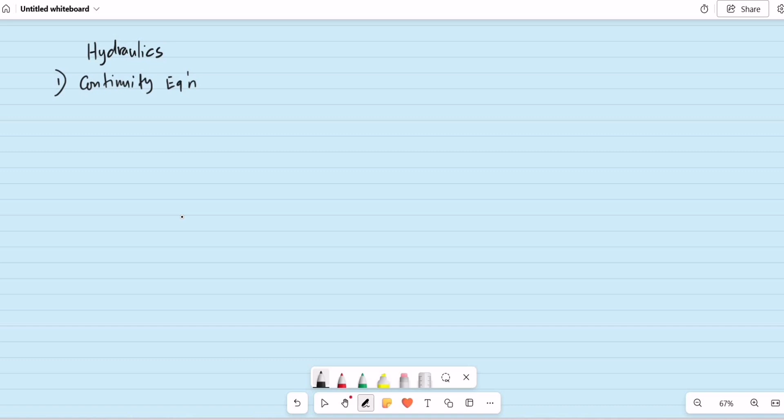So what is the continuity equation? What is the equivalent of Q in hydraulics? It is known as the discharge or the flow rate, equal to the area or cross-sectional area of the conduit times the velocity of flow.

For example, we'll be having a series connection, two pipes connected in series. Continuity equation is derived from the law of conservation of mass. Let's say we have Q1, the discharge in the first pipe, and Q2, the discharge in pipe number 2. So what will be our continuity equation? Basically, Q1 is equal to Q2, or we can write this as area 1 times velocity 1 is equal to area 2 times velocity 2. That is the case when pipes are connected in series.

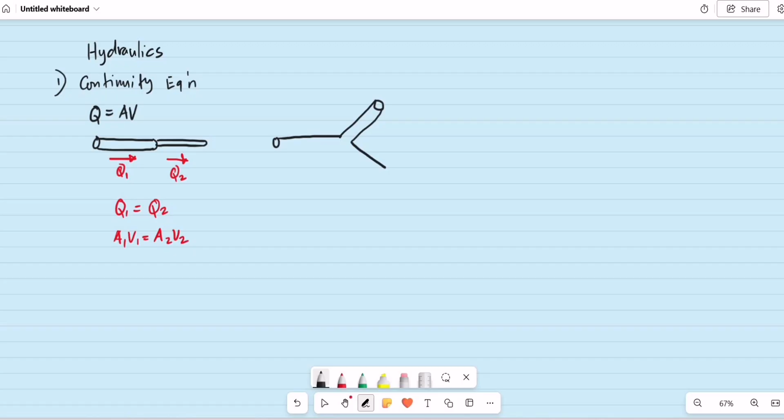Now in case we have a pipe distribution, for example, this is our source. Let's say this is Q1 to be distributed into Q2 and Q3. So our equivalent equation will be Q1, the source, equal to Q2 plus Q3. These are some of the possibilities when it comes to pipe connections, applying the continuity equation.

So the second general equation here in hydraulics is the energy equation, or Bernoulli's equation.

But before we discuss the energy equation, let's go over the energy heads. First, H sub V, the velocity head, which is V squared divided by 2G. We call this the velocity head, basically derived from the conservation of energy from potential to kinetic energy. Take note, when dealing with pipes in hydraulics, I assume the flow is pressurized.

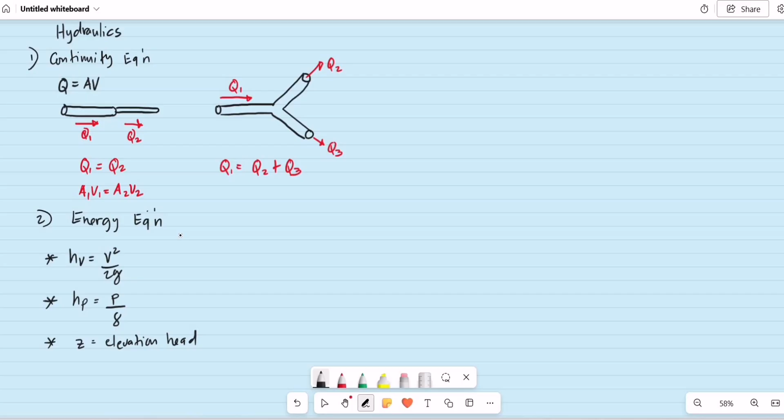So we have the next head, H sub P, the pressure head, which is the pressure divided by gamma, the unit weight of the liquid inside the conduit. And the last one is Z. In most references, they use Z to represent the elevation head. So these are the three energy heads.

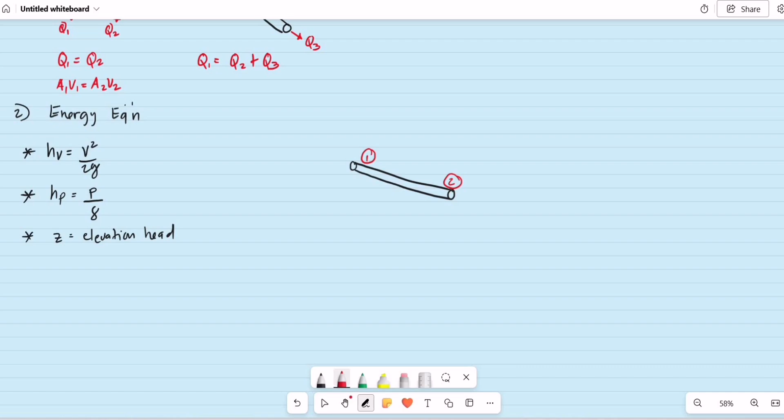So how do we write the energy equation? Let's consider an example. For example, we have a pipe, and all you have to do is consider 2 points if you are to write the energy equation. Let's say this is point 1 and point 2, and the direction of flow is from point 1 to point 2. All we have to do is observe if there are references or elevations given in the problem. So do we have a reference line or datum line? Let's say this is our reference elevation, and the direction of flow is from 1 to 2.

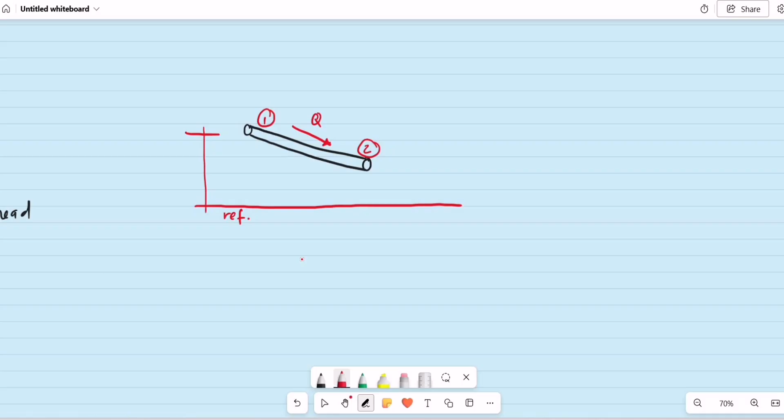So let's have the elevation head of point 1. From our reference, how high is point 1? That is the elevation head of point 1. Above the elevation head, we have the pressure head. Let's say the pressure at 1 is P1 divided by gamma. And above the pressure head, we have the velocity head at 1, which is V1 squared divided by 2G.

Then all we have to do is draw a horizontal line towards the second point. But in actual, the energy grade line goes down with the direction of flow, that is from Bernoulli. The energy grade line goes down with the direction of flow because of head loss. And then on the second point, below the head loss, we have the velocity head at point 2, V2 squared divided by 2G. Below that will be the pressure head at point 2, P2 over gamma, and below that, we'll have the elevation of the second point of the pipe.

So this is our equivalent diagram. All we have to do now is write our equation. This is from the law of conservation of energy, so the energy at point 1 will be equal to the energy at point 2. E sub 1 is basically equal to E sub 2, starting with the elevation head, Z1, plus the pressure head.

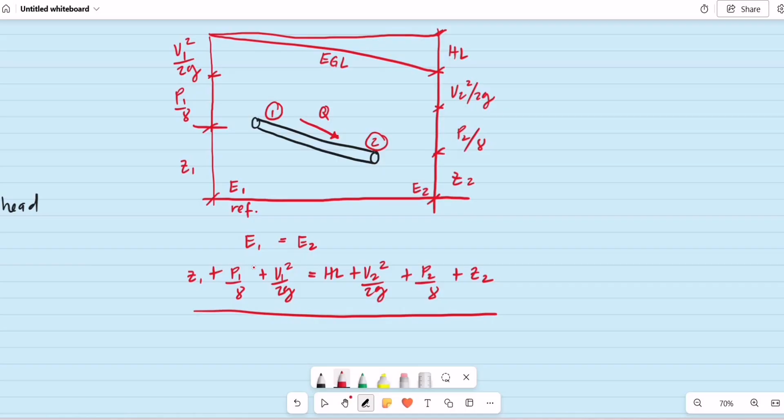We have P sub 1 over gamma, then velocity head, we have V sub 1 squared divided by 2G, that will be equal to, at point 2, starting with the head loss plus V sub 2 squared divided by 2G plus P sub 2 over gamma, and then the elevation head at point 2. So if there are no pumps or turbines involved, this will be our general energy equation for this example.

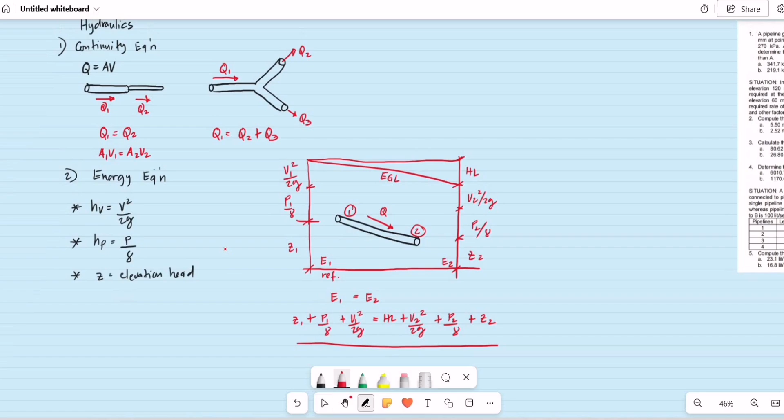Let's have our first example. A pipe gradually enlarges from 300 mm in diameter at point A to 600 millimeters at point B. The velocity at A is 4.6 meters per second, and the pressure at A is 270 kilopascals. Assuming that 1.2 meters of head is lost between A and B, determine the pressure at B if it is located 7.5 meters lower in elevation than A.

These are the given values. The direction of flow is from A to B, so that will be our direction. Let's say point A will be our point 1, point B will be our point 2. So D1 is 300, P1 is 270, V1 is given as 4.6 meters per second, D2 is given, and the required is the pressure at point B. The velocity at point 2 is not given, but we need that for the energy equation.

So what we can do here is apply the continuity equation. The continuity equation states that Q1 is equal to Q2. So Q1 is area 1 times V1, and Q2 is area 2 times velocity number 2.

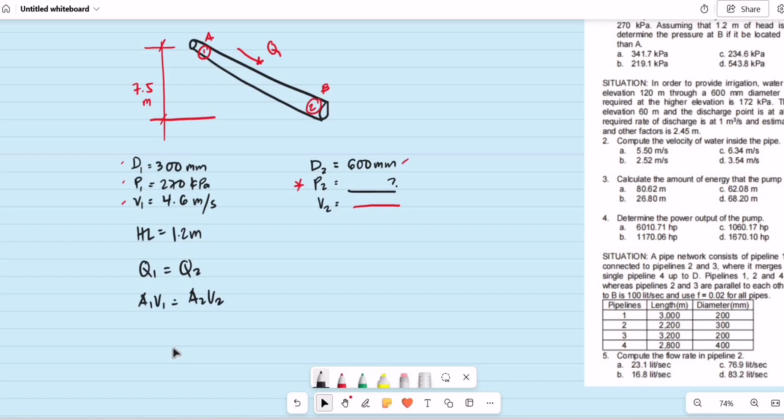Based on the given, what is our area 1? That is pi times 300 mm or 0.3 meters squared divided by 4. Take note that V1 is given as 4.6 meters per second. This is equal to area 2, which is pi divided by 4, diameter at section 2 is 600 mm or 0.6 meter squared, multiplied by V sub 2. So we may cancel out pi over 4.

So we can now compute for the velocity at point 2. That will be 0.3 squared times 4.6 divided by 0.6 squared. So we get 1.15 meters per second. Since the section goes from 300 to 600, it's expected that the flow becomes slower.

As you can see, we have no given reference point or elevations. So what we can do is let our lower point be our elevation 0. Let's start at point 1. Let's say the given 7.5 will be our elevation head at point 1. If we recall, what is above the elevation head?

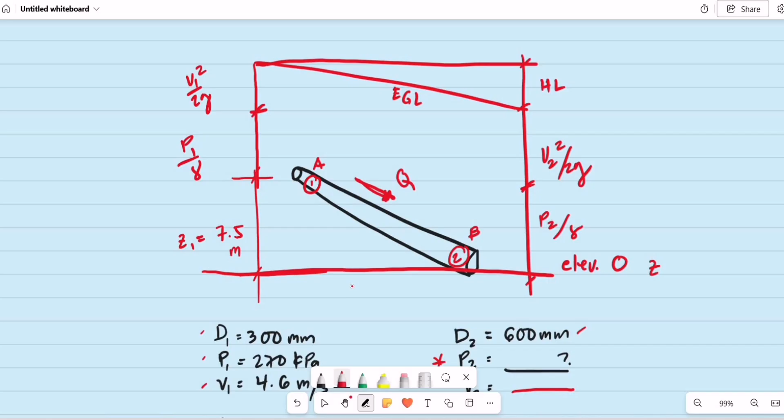We have the pressure head, that is P1 over gamma. Above the pressure head, we have V sub 1 squared over 2G, the velocity head. Let's draw a horizontal line towards the second point. The energy grade line drops in the direction of the flow, due to the head loss. Below the head loss, we have the velocity head at point 2, V sub 2 squared over 2G, and then the pressure head, P sub 2 over gamma. Since we assumed the lower point, point B, to be elevation 0, our elevation head at the second point will be 0. So we can now write our energy equation.

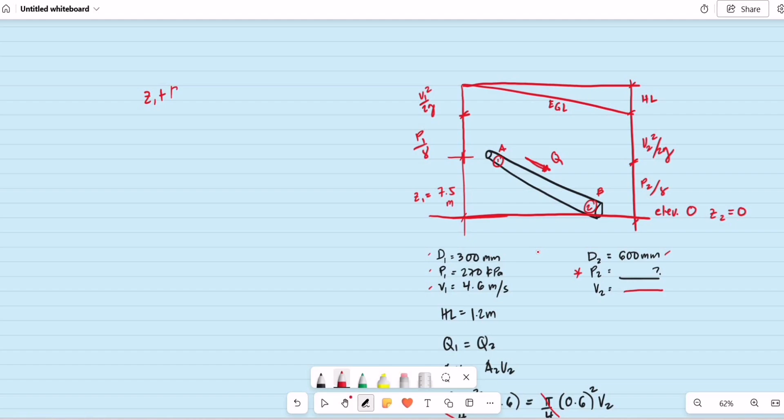Rewriting our energy equation: elevation head at 1 plus P1 over gamma, plus the velocity head V1 squared over 2G, is equal to the energy on the other side, starting with the head loss plus V sub 2 squared divided by 2G plus P sub 2 over gamma, plus elevation at point 2. Now all we have to do is substitute.

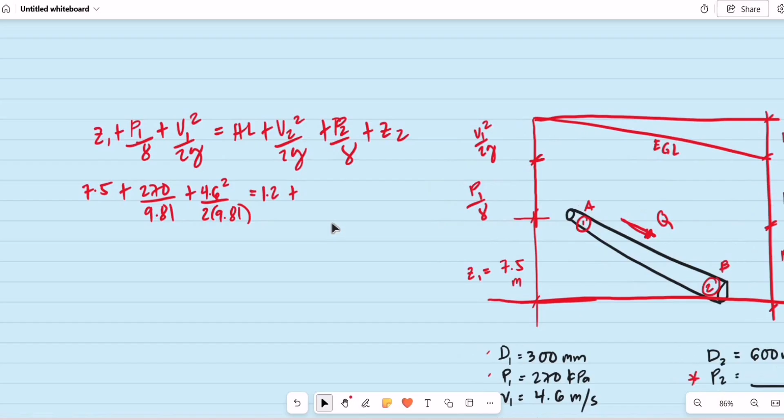What is our elevation head at point 1? It's given as 7.5, plus pressure head at point 1, given as 270 kilopascals divided by 9.81, plus V1 given as 4.6 squared divided by twice 9.81, equal to head loss given as 1.2, plus V sub 2 which we solved earlier as 1.15 meters per second, squared, divided by twice 9.81, plus the pressure head at point 2, P sub 2 over gamma — by the way, our gamma is gamma water, 9.81 — and then elevation head at point 2 is 0.

So in this equation, the only unknown is the pressure head at point 2. Let's compute: that will be 7.5, plus 270 divided by 9.81, plus 4.6 squared divided by 2 times 9.81, minus 1.2.

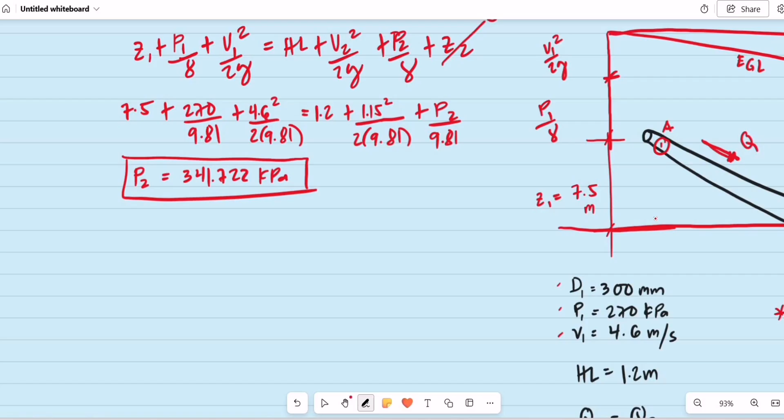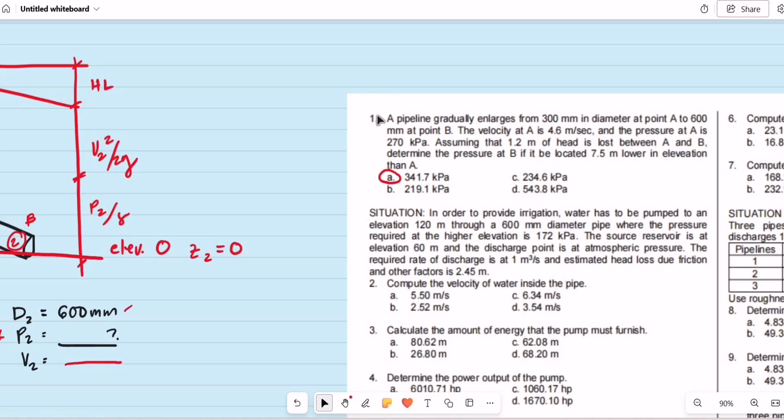And then minus 1.15 squared divided by 2 times 9.81, and then times 9.81. So we have 341.722 kilopascals. So this will be the pressure at point B. Let's check if this is available sa choices. Okay, that will be yung sagot natin sa item number 1, letter A, 341.7. So ito yung solution natin for item number 1.

Okay, so let's have item number 2. This is a situational problem, so number 2 to 4. In order to provide irrigation, water has to be pumped to an elevation of 120 meters through a 600 millimeter diameter pipe, where the pressure required at the higher elevation is 172 kilopascals. The source reservoir is at elevation 60 meters and the discharge point is at atmospheric pressure. The required discharge is 1 cubic meter per second, and the estimated head loss due to friction and other factors is 2.45 meters. So let's have the first requirement, number 2.

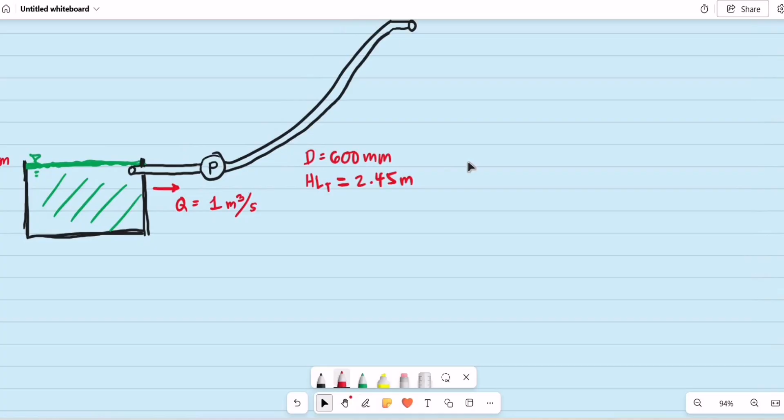Compute the velocity of water inside the pipe. So this is a bonus question, for a reason, di ba, given naman na yung discharge, that is 1 cubic meter per second, and given naman na yung diameter, which is 600 mm. So ang required lang sa number 2 is simply the velocity. So take note, we are using just one diameter of pipe, 600 mm.

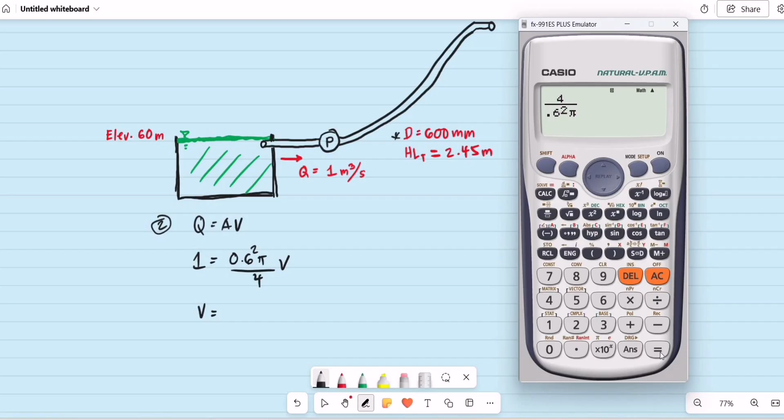So flow rate is equal to area times velocity. So we have that as 1 cubic meter per second. We have the diameter as 0.6, or 600 mm, 0.6 meters squared, pi divided by 4, times the velocity of flow. So ito lang yung tanong sa item number 2. So that will be 4 over 0.6 squared, shift pi. So you have that as 3.537.

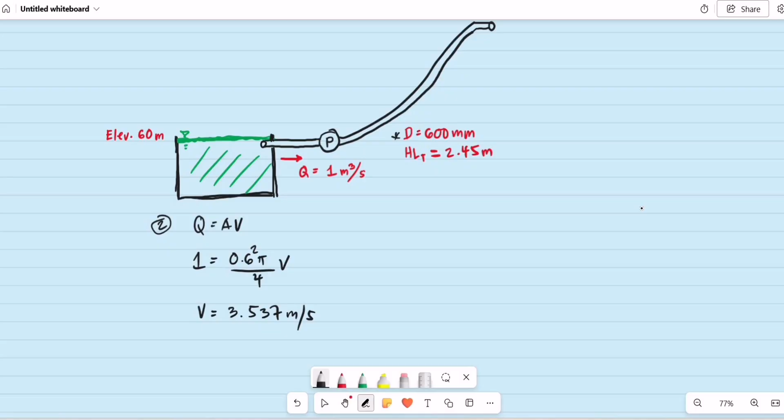3.537 meters per second. Let's check if we have this one sa choices sa item number 2. Okay, so that will be 3.537, closest value is letter D, we have 3.54. Okay, proceed tayo sa question number 3.

Calculate the amount of energy that the pump must furnish. So that will be the head output of the pump. So again, ito yung mga given. So to determine the head output of the pump, we'll be needing to use the energy equation. So kaya lang, ano yung mga points na i-consider natin? Okay, to write our energy equation.

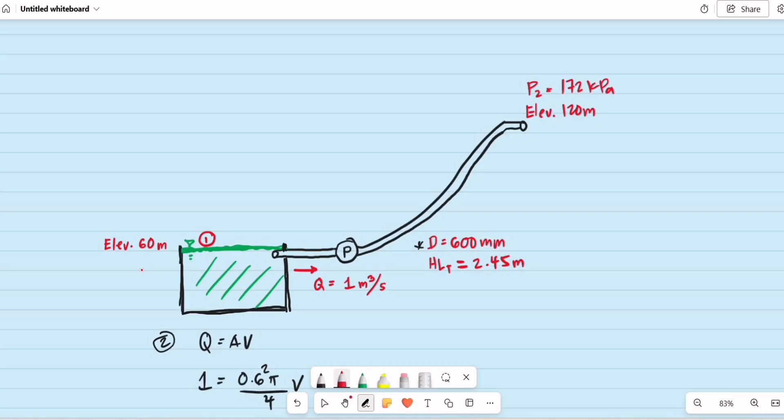Kapag may involved na open reservoir, so open reservoir is an ideal reference point. So sabihin natin, this is our point number 1. Then yung sa elevation 2 natin, 120 meters, siya na lang yung gamitin natin as point 2. Ayan, so bakit ideal na gamitin na reference ang isang reservoir? So when it comes to reservoir, it is exposed to atmosphere, so yung kanyang pressure will be 0.

So P sub 1 is 0. Since wala ring dimension yung ating reservoir, hindi niya given ano yung dimension, gano'ng kalaki, gano'ng kaliit, we cannot actually compute the volume of water in this reservoir. So kahit for example, nagdi-discharge tayo, kinukuha ng pump yung tubig, we cannot actually compute yung volume ng tubig na nawawala dito sa reservoir. So hindi rin natin masasabi na very obvious yung pagbaba ng liquid surface. So kapag malaking reservoir, ina-assume din na yung velocity is 0.

So you can already eliminate two terms kapag ang usapan or ginamit mo ay open reservoir. And then dito sa reservoir, given yung elevation, that is 60 meters, so therefore ito yung ating elevation head. So let's say nandito na yung ating energy level, elevation head Z1. Parang kulang yung energy kaya gagamit tayo ng pump. So let's say nandito yung energy level, dahil sa ang available lang dito is elevation head number 1.

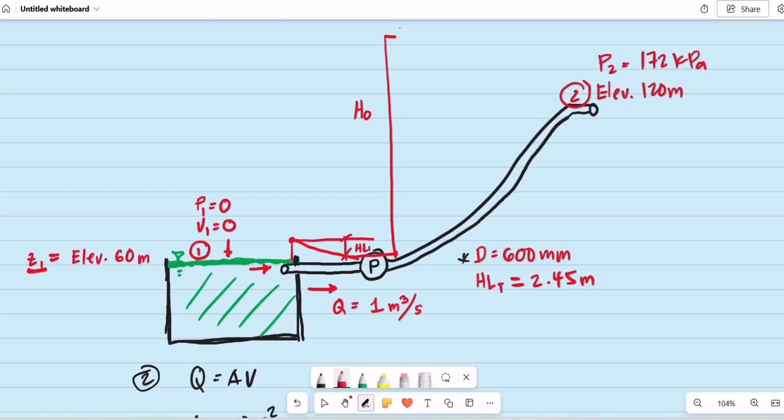Okay, so let's say this is the head output of the pump. And then let's make a horizontal line, or raise it a bit. So let's make a horizontal line towards the second point. Again, our energy grade line will drop.

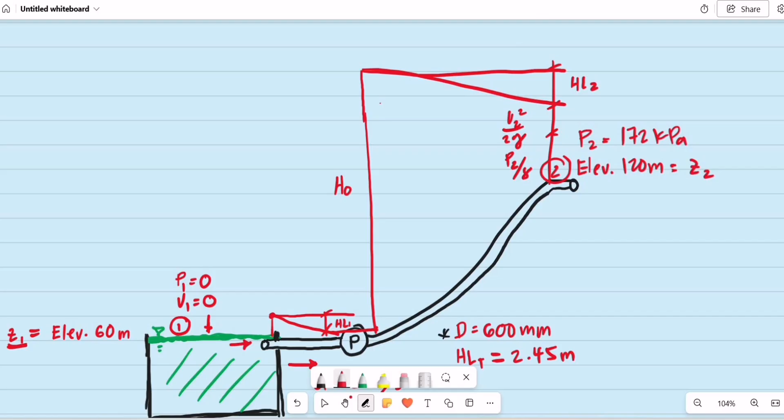That is due to head loss number 2. So what's below head loss number 2? We have V sub 2 squared over 2g, that is our velocity head. Below the velocity head, we'll have the pressure head, that is P sub 2 over gamma. And then the given elevation, 120, that will be elevation number 2.

So if we write the equivalent energy equation, this is elevation 1 plus P1 over gamma plus V sub 1 squared over 2g.

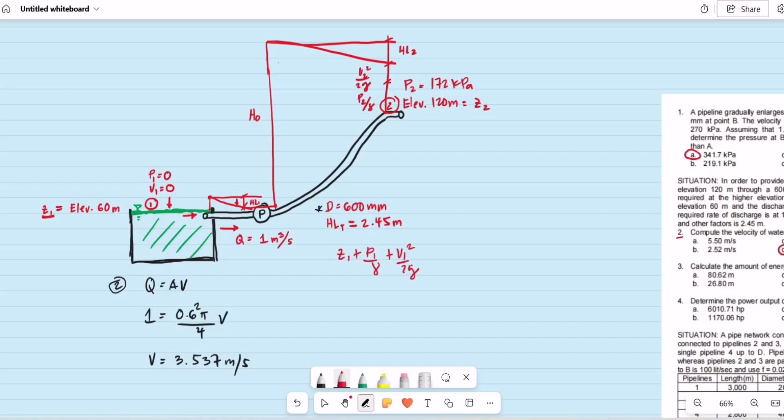But as you can see, from the reservoir to the pump, we'll have a head loss. And the direction of that head loss is supposedly downward. So since it's downward, we should subtract it. So this should be minus head loss number 1.

So now we're at the level of the pump. What do we do? The pump will raise the energy. The energy will be raised by the pump. Let's say this is the head output of the pump. After the pump, let's equate it to the second point, starting with what's at our second point.

Starting with head loss number 2. Below head loss number 2, we have V sub 2 squared divided by 2g. Then we have P sub 2 divided by gamma plus elevation at point number 2.

So what we have to do now is substitute. For item number 2, let's substitute. What's the elevation at section 1? We have that as 60 meters. Plus, again, the advantage of using an open reservoir as reference: zero pressure, zero velocity.

And then, as you can see, this head loss we can transpose to the other side. So that is plus the head output is equal to, so from negative, when we transpose it becomes positive. Head loss number 1 plus head loss number 2, plus V sub 2 squared divided by 2g plus P sub 2 over gamma and then elevation number 2.

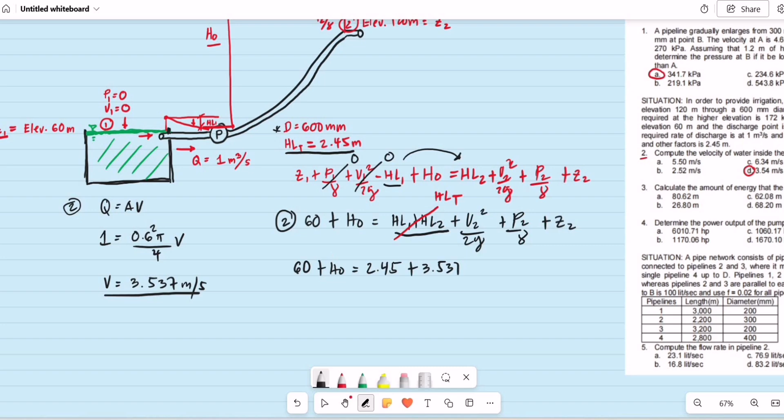And then plus V sub 2, that is the velocity. Only one velocity for the flow in our pipe since it's just one pipe. This is 3.537 squared divided by twice 9.81.

And then plus pressure at 2, that's also given. The required pressure at the exit is 172 kilopascals, divided by 9.81, plus elevation number 2 is 120 meters. So in this equation, the only unknown now is the head output of the pump.

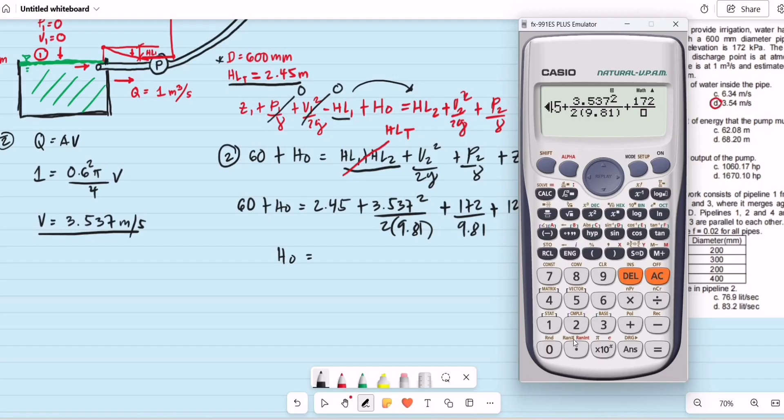So let's try using shift solve. 60 plus alpha x, alpha equals 2.45 plus 3.537 squared, this divided by 2 times 9.81, plus we have 172 divided by 9.81, and then plus elevation number 2 is 120. So, shift solve.

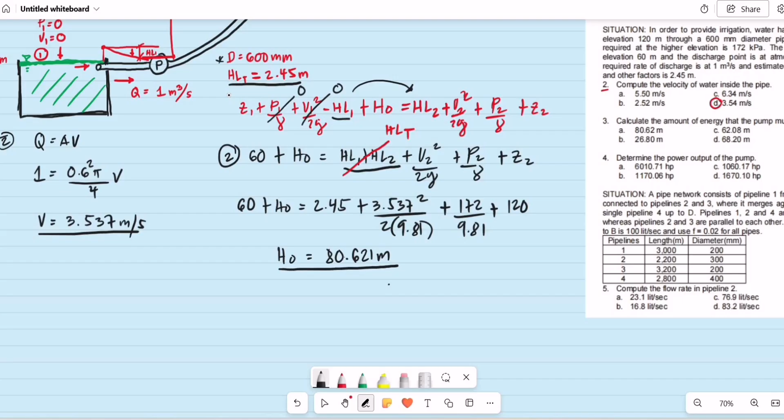So what I got here is 80.621 meters. This will be our answer for item number 2. I saw it earlier in the choices. Oh, no, this is actually number 3. Item number 3 is 80.62 in our choices. So, again, this is item number 3.

And then, the last requirement for this situational problem, item number 4: determine the power output of the pump. So how do we compute for power? This is for item number 4.

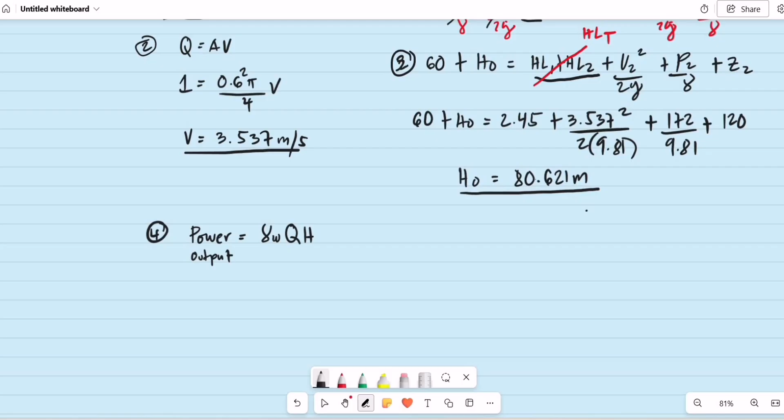When it comes to fluid flow in pipes, power is basically the unit weight of water, if water is our fluid, then we have the discharge and then the head. So if what's being asked is the power output, basically we should use the head output.

And then, what is the required unit? It is in horsepower. So we substitute: gamma water is 9,810 newtons per cubic meter. Take note, the given discharge earlier is simply 1 cubic meter per second.

And then our computed head output is 80.621 meters. So if you do unit analysis, the cubic meter cancels out. What unit is left here? What's left is newton-meter per second, or basically this is watts.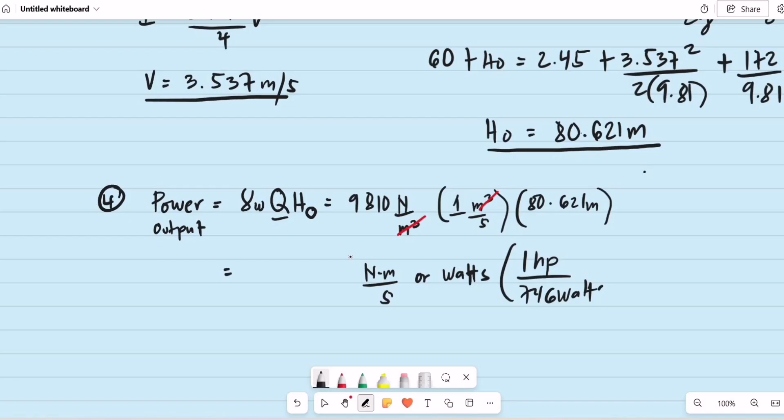Then, if we convert it to horsepower, this is multiplied by, we have 1 horsepower is to 746 watts. So whatever value we get here, divided by 746, so that the final answer will be in the unit of horsepower.

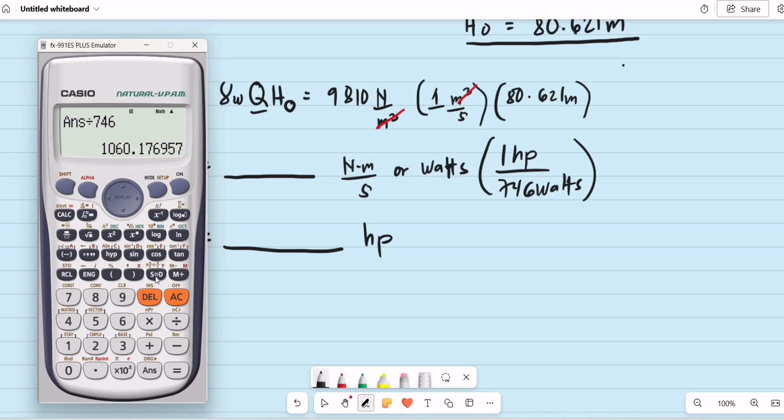Ayan, so we have 9,810 multiplied by 80.621, so that will be in watts divided by 746. So we get 1,060.177 horsepower. So let's check if we have this one sa choices.

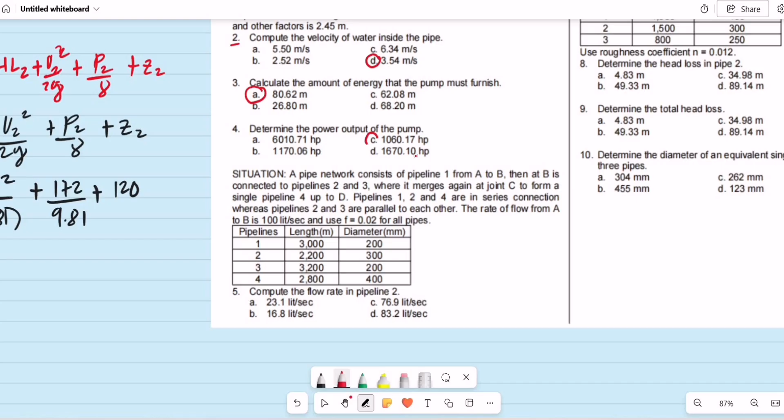Alright, so the closest value, okay, let's have it as letter C, for item number 4. So ito yung solution natin for the situational problem, we have number 2 to 4.

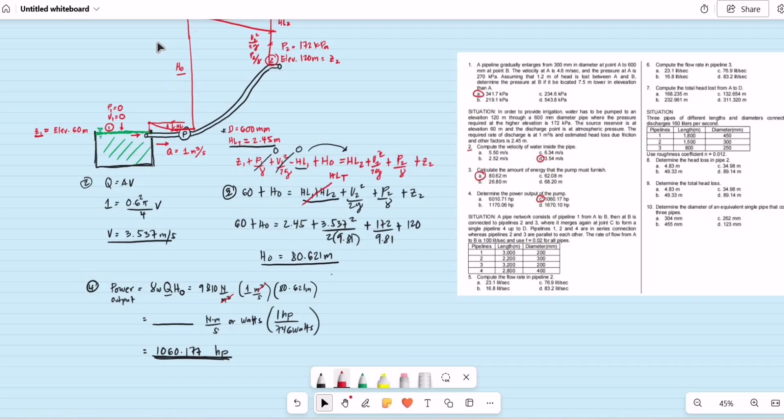Okay, so let's proceed sa next situational problem, that is, I think, 5 to 7. So a pipe network consists of pipeline 1 from A to B, then at B connected to pipelines 2 and 3, where it merges again at point C to form a single pipeline 4 up to point D. Pipelines 1, 2 and 4 are in series connection, whereas pipeline 2 and 3 are parallel to each other.

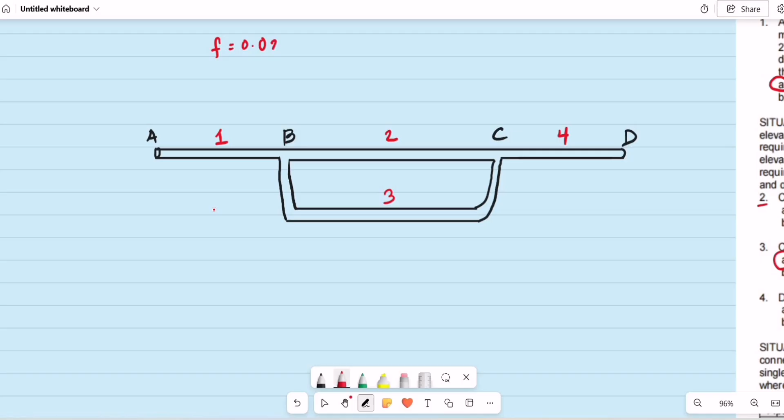So the rate of flow from A to B is 100 liters per second, and use f equal to 0.02 for all pipes. So parang yung equivalent illustration natin will be like this. So given, for all pipes, gagamit daw tayo ng friction factor equal to 0.02. And then for pipe number 1, that is pipe AB, given na yun, let's say Q1 equal to 100, that is 100 liters per second.

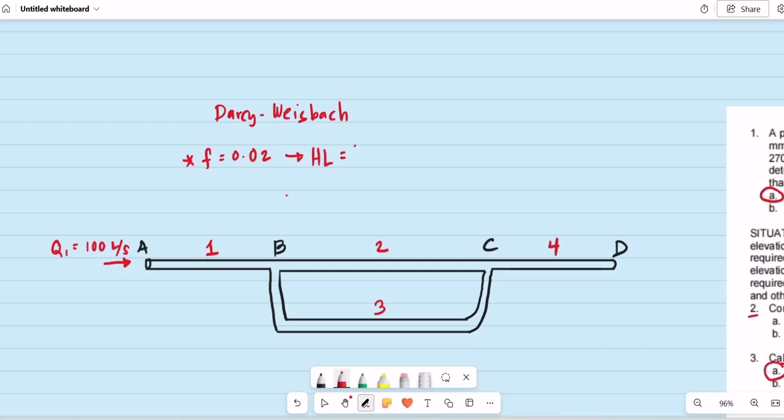So take note, if ang given is friction factor, we are to use yung formula ni Darcy-Weisbach, pwedeng in terms of the velocity, head loss, ito yung okay. So again, when it comes to the Darcy-Weisbach, yun, ang ini-introduce is usually the friction factor. So supposedly if we have more time, we can discuss yung kanilang formula. So kapag ang given is friction factor, ang equivalent ng head loss, the usual is the H sub F, which is equal to, pwedeng in terms of velocity, we have the friction factor multiplied by the ratio of the length to the diameter, then multiplied by the velocity head, the V squared over 2G.

Kung i-expand lang natin yung equivalent ng V in terms of Q, then we simplify using yung constant ng G, we can have it as 0.0826, the friction factor, length, Q squared, and this is divided by the diameter raised to 5. So ito yung formula ni Darcy-Weisbach.

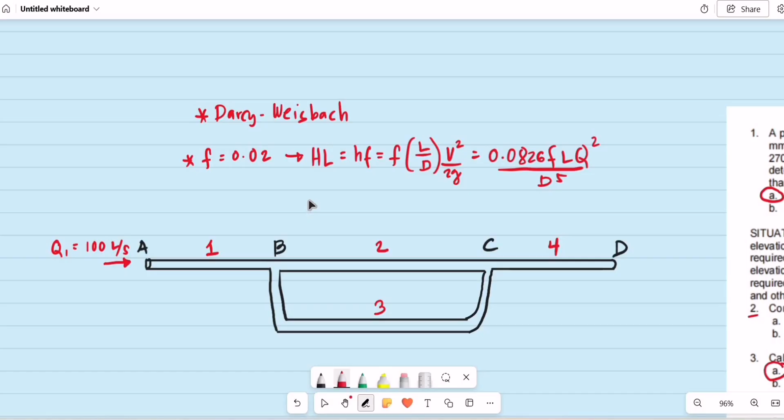So ano yung first requirement is compute the flow rate in pipeline number 2. So we have Q1 again is given 100 liters per second. Hinahanap yung Q sub 2, and then siguro mamaya yung ibang required Q sub 3. And okay, dito sa CD, we'll be having Q sub 4. Ang equivalent ng continuity equation nito, we have that as Q1 is equal to Q sub 2 plus Q sub 3. And then, mag-merge naman sila ulit doon, that will be the same or equal to Q sub 4, that is equal to 100 liters per second.

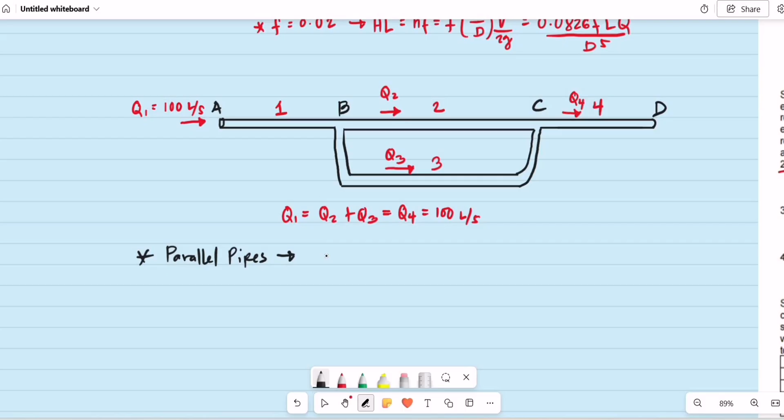Ayan, so how do we compute for Q sub 2? So, common ito sa board exam actually when it comes to pipe networks or pipe systems. The usual start ng solution nito is that kung meron tayong parallel pipes, they will have equal head loss. So, sino yung parallel pipes natin? Ang parallel pipes natin is si pipe number 2 and pipe number 3. So, we can write that head loss ni pipeline number 2 ay equal sa head loss ni pipeline number 3. Ano yung reason behind kung bakit equal ang head loss ng parallel pipes?

So, kung gagawa tayo ng energy equation, which is ginawa natin sa mga previous example, from B to C, for example, di ba, kailangan lang natin ng 2 points. So, sa point B and then point C, kung gagawa natin siya ng energy equation, isang head loss lang yun. So, that's why when it comes to parallel pipes, we have equal head loss.

Okay, so gamitin natin yung mga properties ni pipeline number 2 and pipeline number 3. So gamit na lang tayo ng formula ng discharge. So formula ng discharge is H sub F by Darcy-Weisbach, 0.0826, friction factor, the length, the discharge squared, and then the diameter, this is raised to 5. Okay, so mag-substitute tayo, properties ng head loss 2 and head loss number 3. So we have 0.0826. Ano yung friction factor? For all pipes, we're using 0.02. And then, kay pipe number 2, ano yung kanyang length? The length is 2,200. Then, this is Q sub 2 squared. And then, divided by, ano yung diameter ni pipeline number 2? We have 300 mm, so that is 0.3. This is raised to 5.

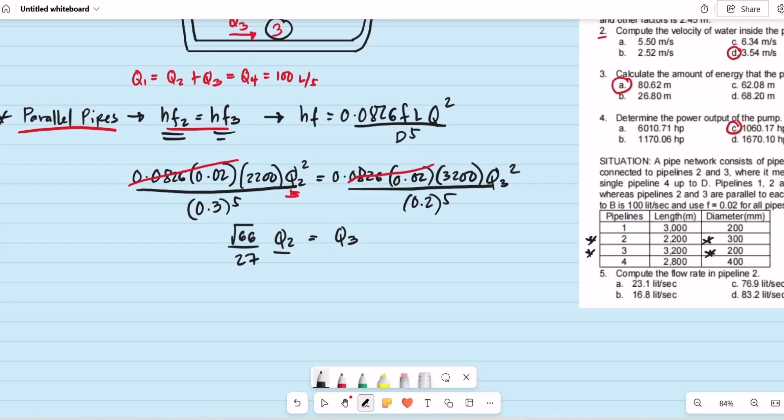So basically, yung ginawa ko, I express the value of Q sub 3 in terms of Q sub 2. So to solve for item number 5.

For item number 5, balik lang tayo sa pinaka-basic natin na equation, the continuity equation. So that is basically we have Q sub 2 plus Q sub 3 is equal to yung given na Q1.

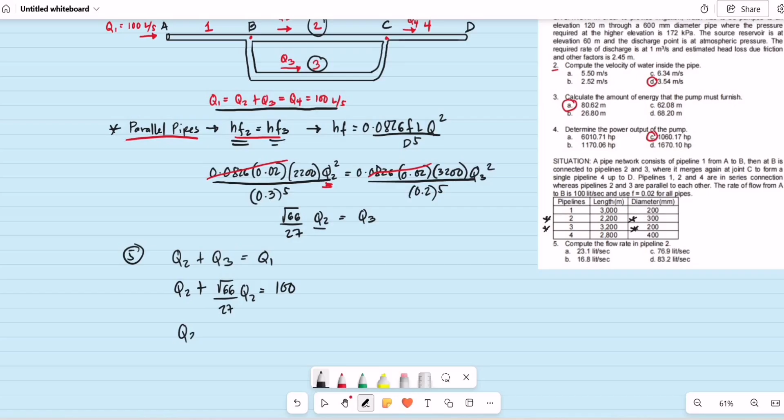So we substitute, this is Q sub 2 plus an equivalent ng Q sub 3. Q sub 3 is the square root of 66 divided by 27 of Q sub 2, is equal to Q1. Q1 is 100 liters per second. So as you can see in this equation, ang unknown na lang is Q sub 2. So let us compute.

So Q sub 2, that is simply 1 plus the square root of 66 divided by 27, and then 100 liters divided by that value. So ang nakuha dito is 76.87 liters per second. So check natin.

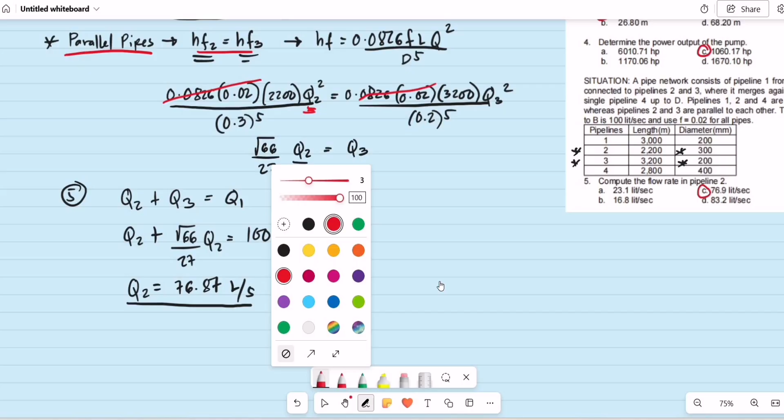Do we have this one sa choices? Okay, closest value will be letter C. And so we have 76.9 liters per second. That will be letter C.

So paano naman yung follow-up question? Number 6. Number 6 is compute the flow rate in pipeline number 3. Ayan, madali na lang yan. Balikan na lang natin yung ating continuity equation.

So this is for question number 6. Okay, we have Q sub 2 plus Q sub 3 is equal to Q sub 1. So Q sub 2, na-compute natin, that is 76.87, plus Q sub 3, and then equal to 100 liters per second. So ito naman yung discharge kay pipeline number 3.

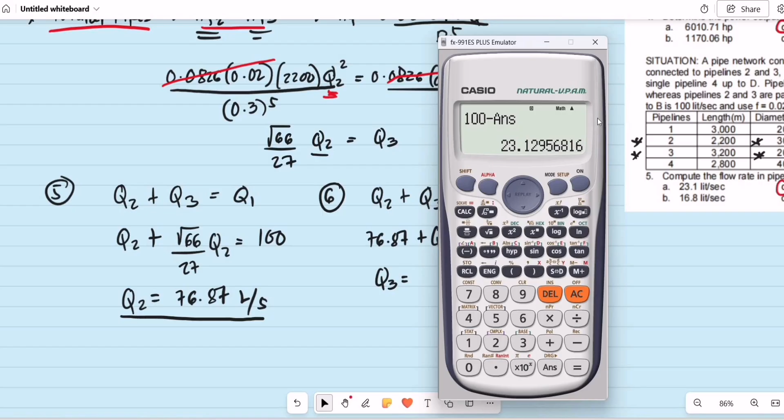So simply 100 minus this value, 23.13. Ayan. So we have 23.13 liters per second. So ito naman yung sagot natin sa item number 6. Okay, that will be closest value natin, si letter A, 23.1 lang yung nandito.

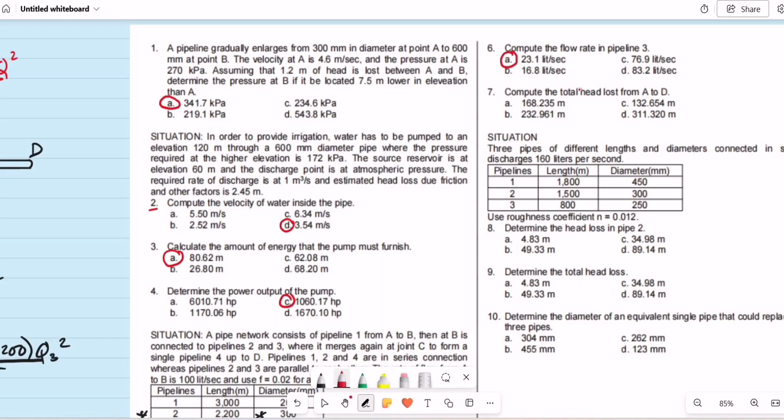So yun yung sagot natin sa item 5 and 6. And then yung last requirement, item number 7, compute the total head loss from A to D.

So when it comes to the total head loss, focus lang tayo sa mga series. So ano yung mga connected in series? Sino yung mga pipes na yun? Pipe number 1, 2, and then number 4.

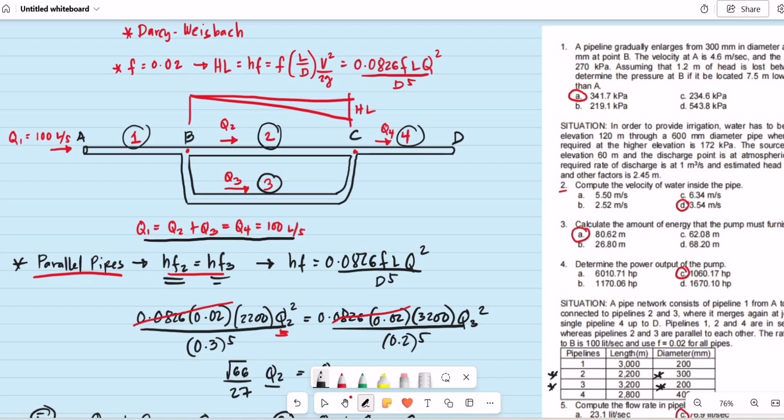So again, take note that head loss 2 and 3 will share the same head loss. Isang head loss lang yun. So no need to times 2 or head loss 2 plus head loss 3. Hindi ganon. So basically, how do we compute for the total head loss?

Kay item number 7, yung ating total head loss will be equal to head loss number 1 plus head loss number 2 or number 3. Gamitin na lang natin si number 2, and then head loss ni number 4. So again, no need to times 2 yung head loss 2 or plus head loss number 3. Isang head loss lang ang pipe number 2 and pipe number 3.

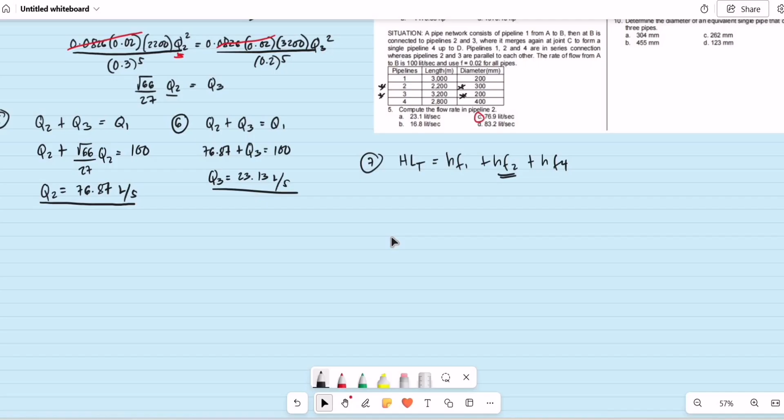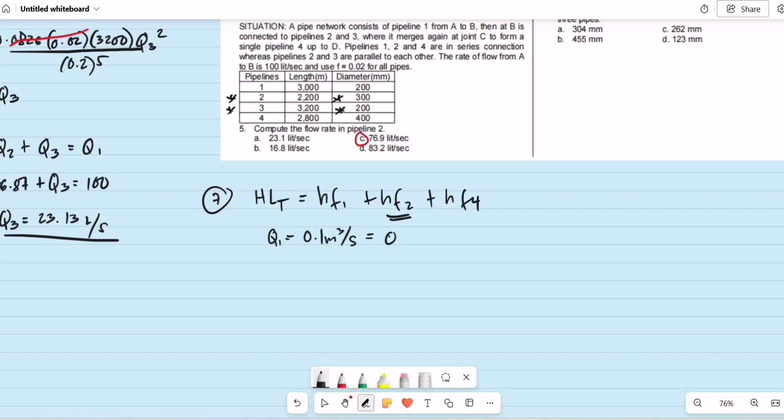So let us compute for the head losses using yung discharge formula. So we have Q1. Ang Q1 natin is 100 liters per second or 0.1 cubic meter per second. That is the same as Q sub 4, diba? Equal lang yung Q1 and Q4 kasi nag-merge ulit yung 2 and 3. So again, gamitin natin yung discharge formula ng head loss.

So let's say head loss number 1 is equal to 0.0826, friction factor is 0.02. Okay, ano yung length ni pipeline number 1? 3,000 meters. Q sub 1 is 0.1 squared, and then divided by diameter ni pipeline number 1 is 0.2. This is raised to 5. Equal to?

Nawawala yung calculator. Na-close yata natin.

Head loss number 1 is 0.0826 times 0.02, with length 3,000, then 0.1 raised to 5, divided by diameter of 0.2 raised to 5. So we get 0.154875 — that seems too small.

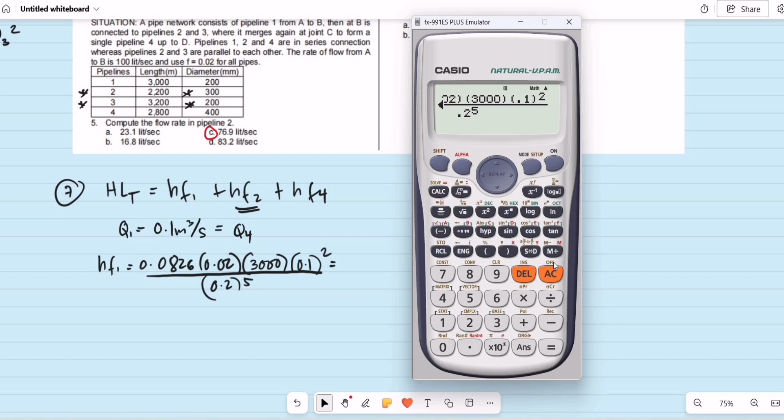Let's counter check if that's correct. Okay, that was wrong — it should just be squared. So we have that as 154.875. So head loss number 1 is 154.875 meters.

And then head loss number 2 or head loss number 3 — head loss 2 is basically equal to head loss number 3. I'll use the properties of pipeline number 2: 0.0826, friction factor 0.02, length of pipeline number 2 is 2,200.

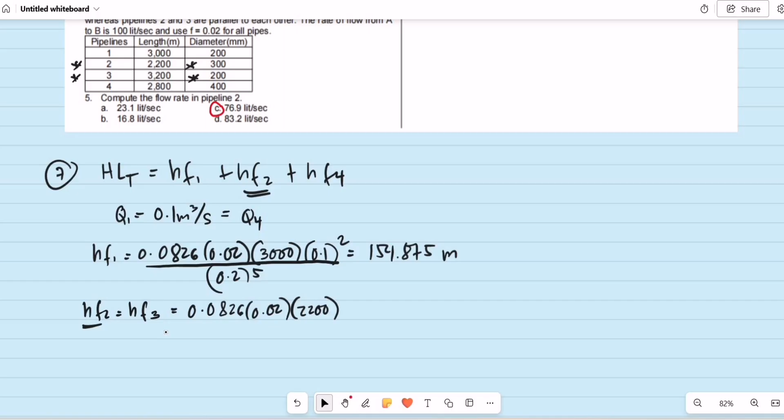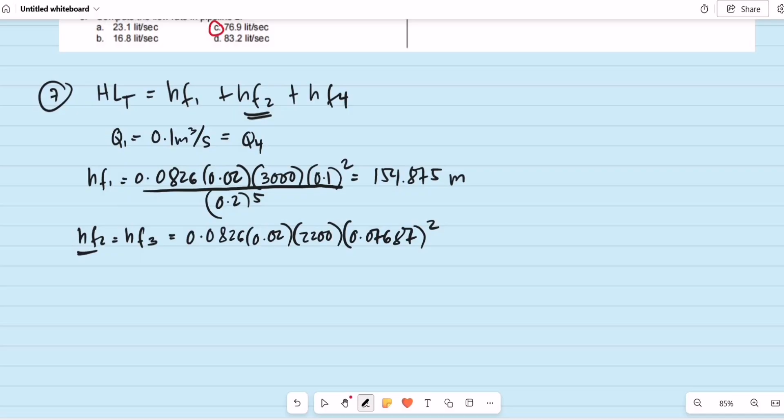What did we get earlier for Q sub 2? 76.87 liters, in cubic meters divide by 1,000, giving 0.07687 cubic meters per second. So discharge number 2 is 0.07687, squared, divided by the diameter of pipeline number 2.

The diameter is 0.3, raised to 5. So what do we need to change here? The length and discharge, and also the diameter. Discharge is 0.07687, length is 2,200, diameter is 0.3. We get 8.838 meters.

Now the last one, pipeline number 4. Head loss of pipeline number 4 equals 0.0826, friction factor 0.02, length of pipeline number 4 is 2,800. Again, Q1 is the same as Q4, so 0.1 squared, divided by diameter of 400 mm or 0.4, raised to 5.

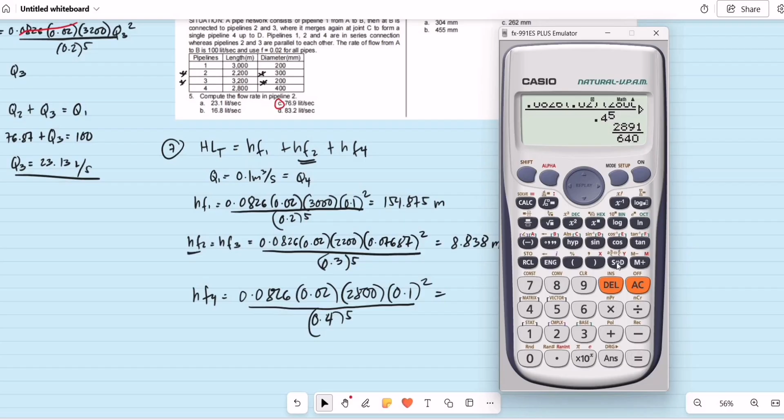Let's edit the diameter — the diameter is 0.4, discharge is the same as 0.1, length is 2,800. So we get 4.517 meters.

So the total head loss equals head loss 1, 154.875 meters, plus head loss 2 or head loss number 3, 8.838, plus head loss number 4, 4.517 meters. This will be the total head loss of this pipe network.

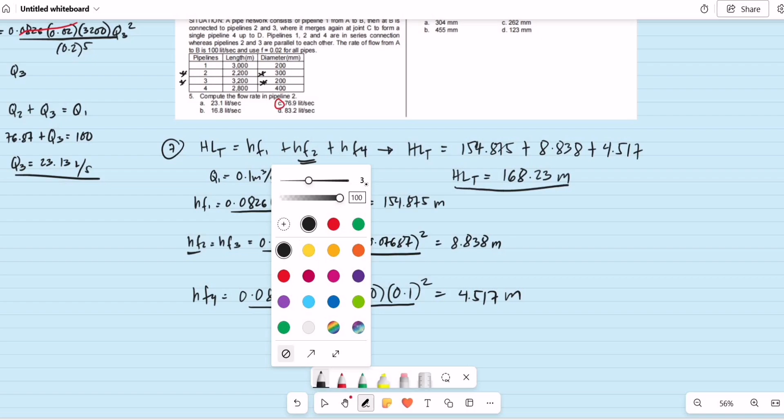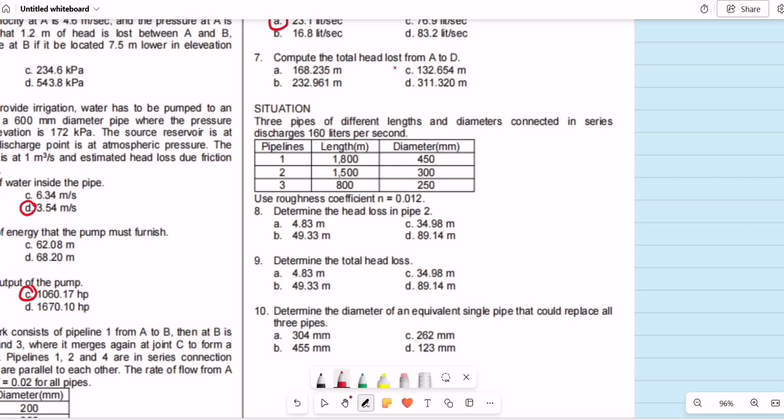So we have 154.875 plus 8.838 plus 4.517 equals 168.23 meters. Let's check item number 7 to see if this matches the choices — 168.23 meters. The closest value will be letter A, 168.235. This will be our solution for items 5 to 7.

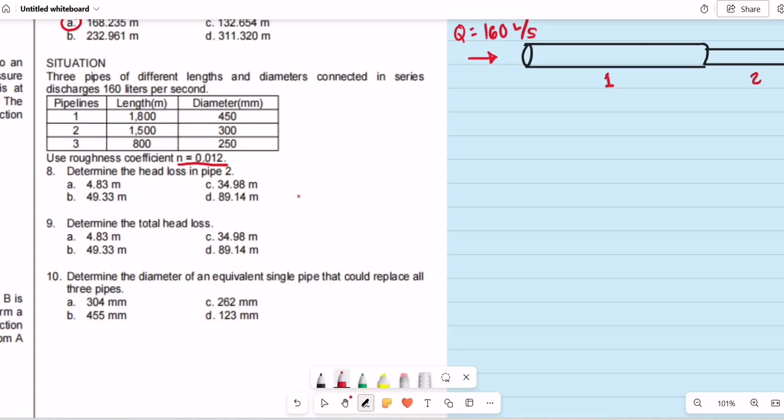Okay, let's move to items 8 to 10. This is another situational problem: 3 pipes of different lengths and diameters are connected in series, discharging 160 liters per second. These are the pipe properties, and we use a roughness coefficient n equal to 0.012.

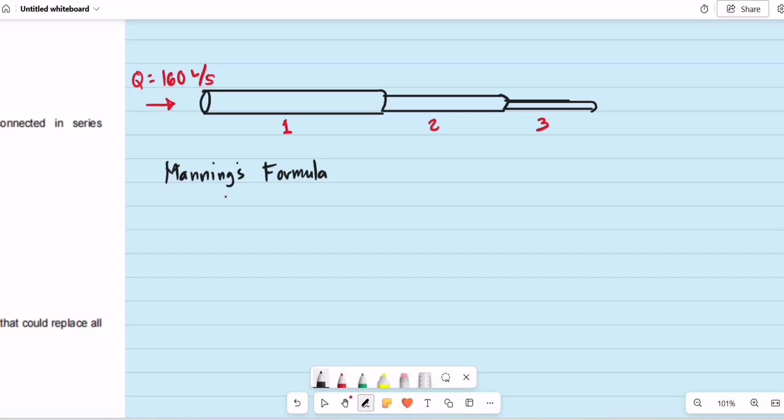Since the given is the roughness coefficient, we are to use Manning's formula. The velocity formula is: velocity equals 1 over the roughness coefficient, times the hydraulic radius raised to 2 over 3, times the hydraulic slope raised to 1 half. The hydraulic radius is the area divided by the wetted perimeter, and the hydraulic slope is generally the head loss divided by the length of the pipe.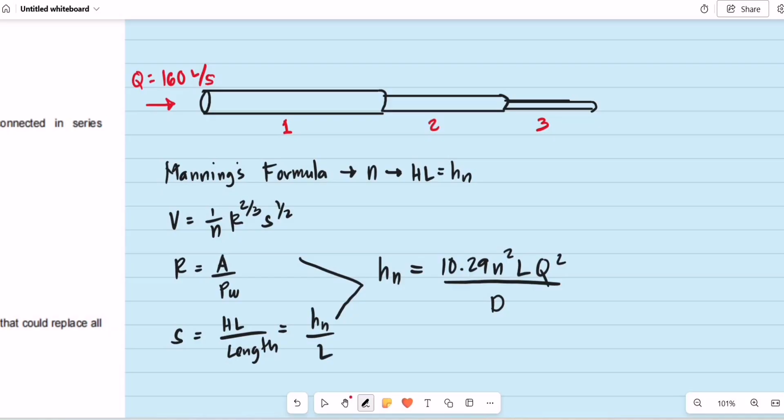In Manning's formula we use the roughness coefficient n, and the head loss is usually denoted h sub n. So we can rewrite the hydraulic slope as h sub n divided by the length. Using these equivalents for R and S, we derive the formula for head loss in pipes under Manning's: H sub n equals 10.29, n squared, times L, times discharge squared, divided by diameter raised to 16 over 3. This is the Manning's formula for head loss in pipes.

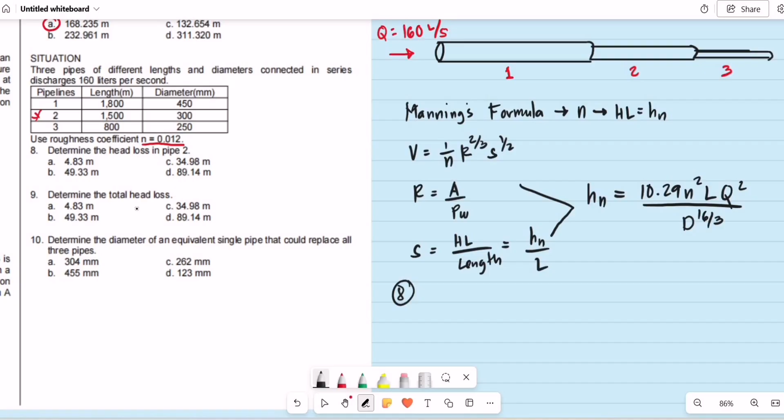Let's do the first requirement, item number 8: determine the head loss in pipe number 2. These are the properties of pipeline number 2: length 1,500, diameter 300 mm. For item 8, it's just a direct formula substitution since the pipes are connected in series, so Q1 equals Q sub 2 equals Q sub 3 — all equal to 160 liters per second.

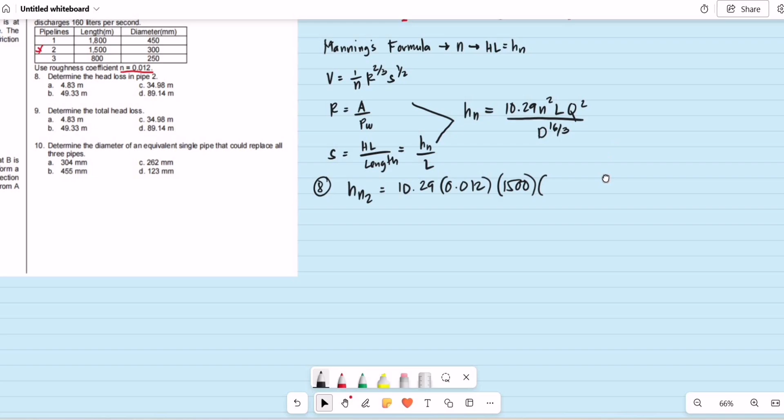For item number 8, let's substitute directly: head loss in pipeline number 2 equals 10.29, roughness coefficient 0.012, length of pipeline number 2 is 1,500 meters, discharge is 160 liters per second or 0.16 cubic meters per second, squared, divided by the diameter of pipeline number 2, 0.3, raised to 16/3. This is our answer for item number 8.

So we have 10.29 times 0.012 squared, length is 1,500, and then we have 0.16 squared for the discharge. The diameter is 0.3, raised to 5 — correction, we're in Manning's formula now, so it should be 16 divided by 3. Solving that gives us 34.978 meters. This is the head loss of pipeline number 2.

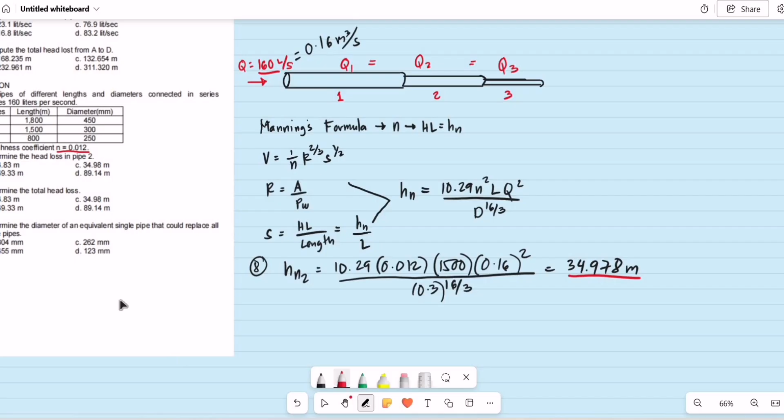So if you observe item number 8, our answer should be letter C.

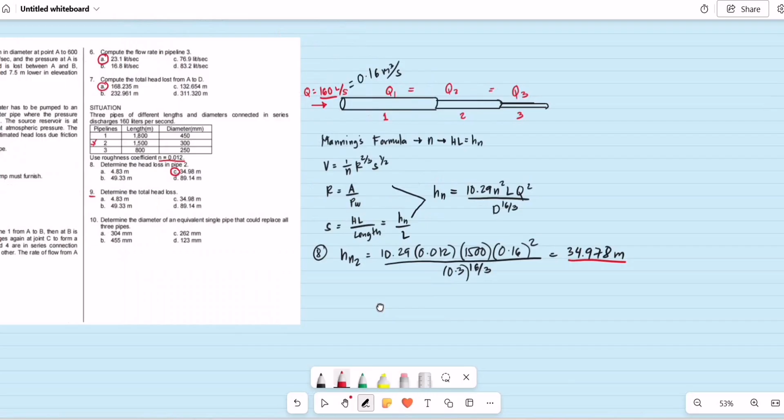Now for question number 9: determine the total head loss. We still need the head loss of pipeline number 1 and pipeline number 3, since we already have pipeline number 2's head loss. Let's solve for number 9, starting with head loss number 1 equal to 10.29 times 0.012 squared.

What's the length of pipeline number 1? We have that as 1,800, with the same discharge of 0.16 squared. The diameter of pipeline number 1 is 0.45 meters, or 450 mm, raised to 16/3. So head loss number 1 — let's just edit this.

So we have the diameter, let's just change it to 0.45, and the length, let's make that 1,800. So head loss number 1 is 4.829 meters. And then we have head loss number 3 equal to...

10.29 times 0.012 — correction, that should be squared. Was it squared in our calculator earlier? The n? Yes, it's squared. Correction here, the n should be squared. So 0.012 squared, length of pipeline number 3 is 800, the same discharge of 0.16 squared, and the diameter of pipeline number 3 is 0.25 raised to 16/3.

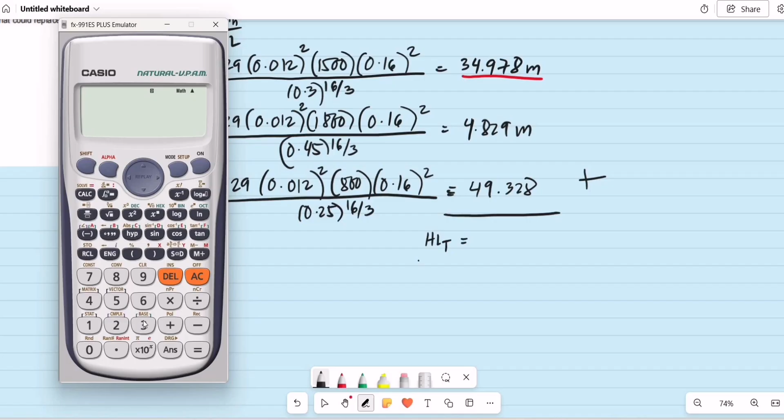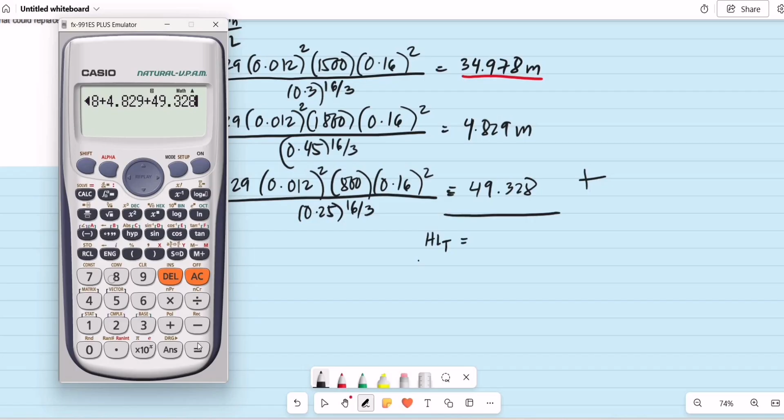What's required for item number 9 is just the total, so let's add up the head losses. This is the total head loss of the pipes connected in series. So for number 2 we have 34.978, plus 4.829, plus 49.328, giving a total of 89.135 meters. Again, for a series connection of pipes, the total head loss is simply the summation of all head losses.

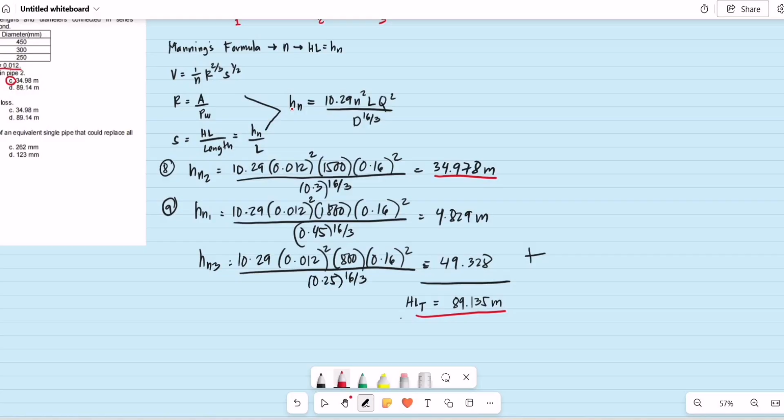Okay, let's check our choices for 89.135. So the closest value for item number 9 is letter D, 89.14.

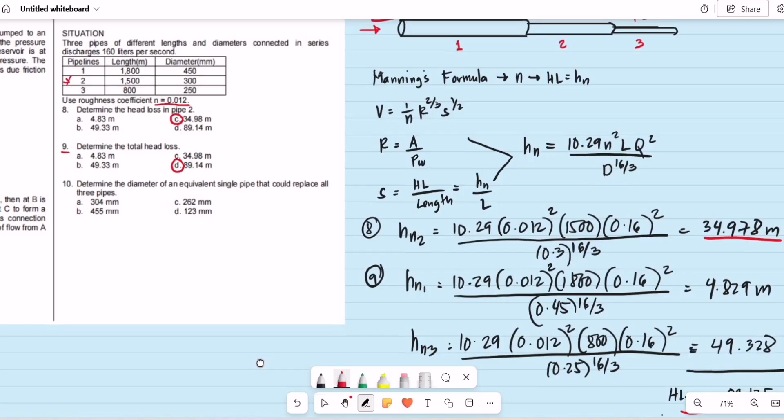Then for the last requirement, number 10: determine the diameter of an equivalent single pipe that could replace all 3 pipes. As you can see, they are connected in series with different diameters. So what's required in number 10 is to make it into just one diameter. But if we are to replace these 3 pipes with just 1 pipe, it should have the same capacity.

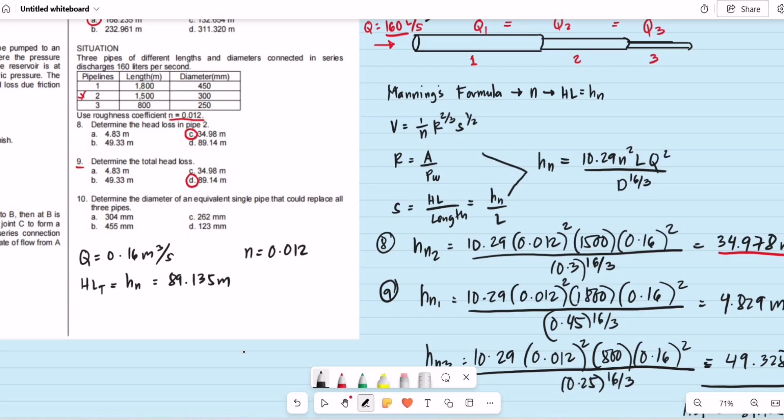A capacity of 0.16 cubic meters per second, corresponding to the same head loss. Its head loss should be the total head loss, H sub n equal to 89.135 meters. Since no new properties were given, we use the same roughness coefficient of 0.012. So from Manning's formula, we have H sub n equal to 10.29 n squared L Q squared divided by the diameter raised to 16/3.

So what we're looking for is the diameter. If we substitute, the same head loss of 89.135 meters equals 10.29 times roughness coefficient 0.012. Now what about the total length? The total length of our pipe is the summation of the lengths of the three pipes: 1,800 plus 1,500, that's 3,300, plus 800. Is that right? 4,100. Yes, that's correct.

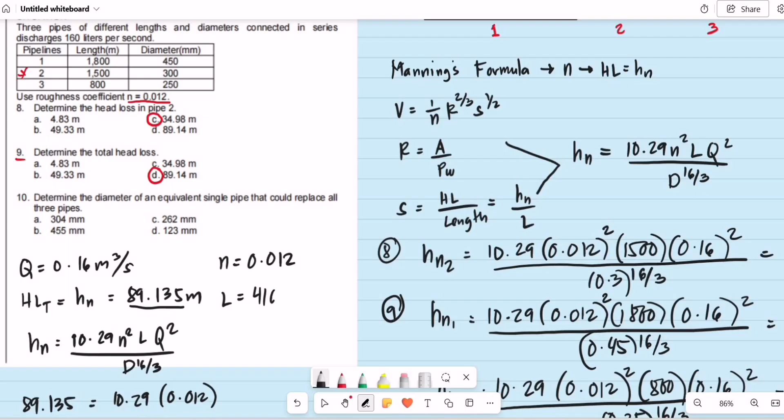So since it's now just one pipe, it's the summation of the three pipes' lengths: 4,100 meters. Again, this should be squared. We have 4,100, with the same capacity 0.16 squared, divided by the new diameter raised to 16 over 3. The diameter we'll solve for should be in meters.

So to compute for the diameter, we have 10.29 times 0.012 squared, then 4,100 multiplied by 0.16 squared, divided by the head loss 89.135 — you can also cross-solve if you want — then raised to 3 over 16. So we get 0.304 meters, or in millimeters, 304 mm.

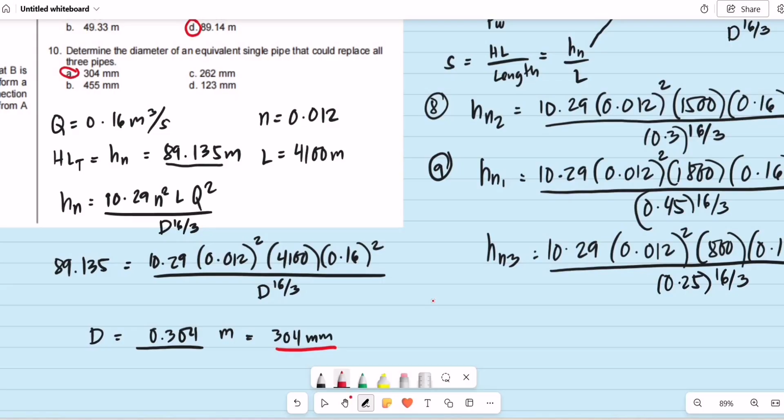This matches the value in our choices for item number 10: 304 millimeters. Okay, this will be our solution for problems 8 to 10.